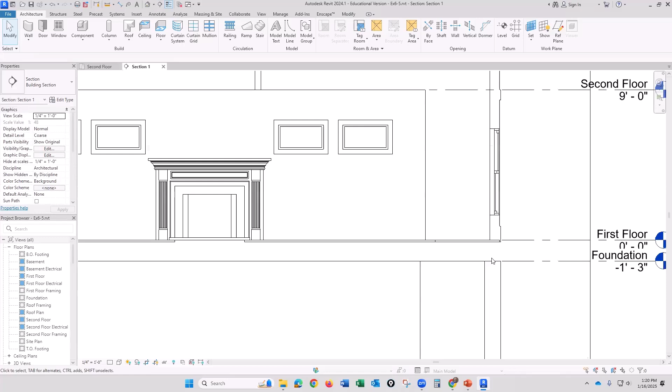You'll notice he hasn't had you put the floor in yet here. What we're going to have to do is make sure that the face of the siding is lining up with the face of the foundation wall.

Now, in order to see how that actually looks, I'm going to turn the detail level to either medium or fine, and I'm going to zoom in on it.

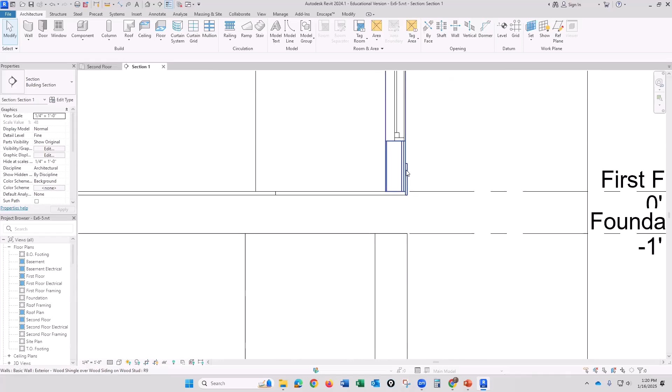So what he's asking for: this is the drywall, this is my stud, this is my plywood or OSB sheeting, this is my siding, and this is my trim or my sweep.

And then there's another sweep up here. So I'm going to tell you what the real world is and what the book is. The real world is face of stud lines up with face of concrete, because then your siding and your plywood overhang that a little bit, and they're not sitting in water all the time at the bottom. The water can just drip free of them.

But this person who wrote the book decided we're going to line them up, and the beauty of that is if you dimension your wall to the face of the stud and your foundation to the face of the concrete, if the dimensions are the same, you know it lines up. If one's 48, the other's 48. There's none of this confusion. When you're building it, it just makes your life easier.

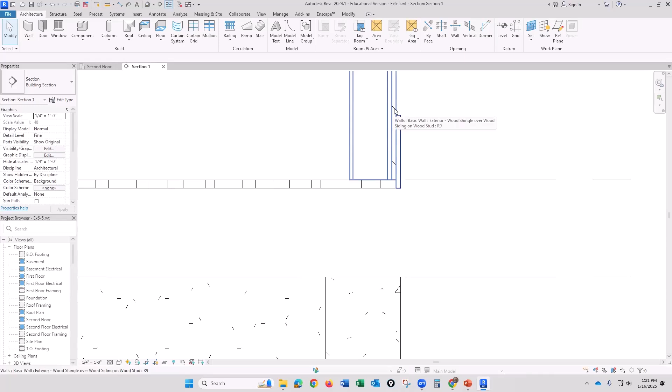But let's just say our boss is stupid and requires us to dimension it to the face of the siding. So the easiest way to do that, if that was a comment on yours, is to use the align command in the section.

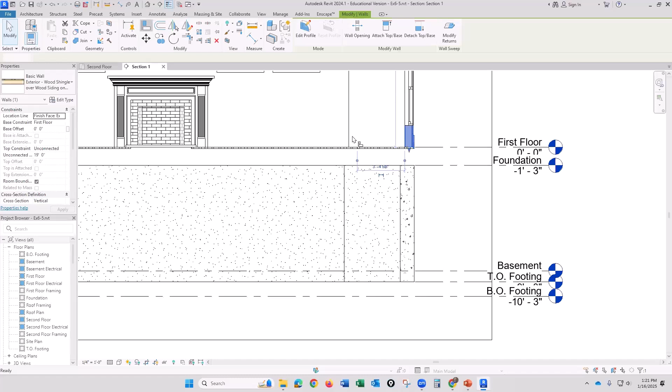So what we're going to do is click on, just to get my align command to show up here, I'm going to go to align. I want to align to the face, and then I want to go to this face here. I don't want to go to the trim board.

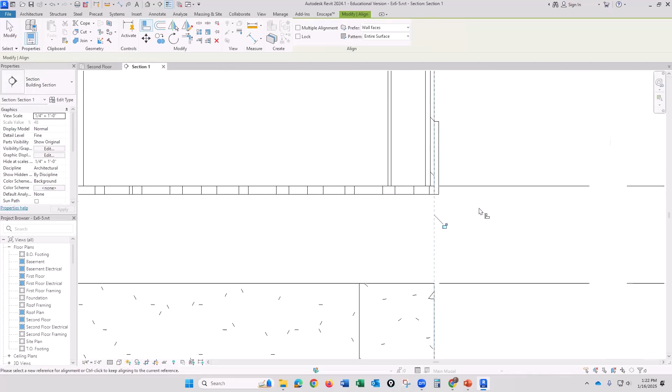And when you're dimensioning your floor plan for chapter 7, that's the one you want to go to. There's a little diagram on Pete's notes in plan that shows which line you want to pick. So in order to get that to line up, you just have to cut a section.

And then once you get into this align command, you align it like that. Once you've done that, I can move this section out here and get these two walls. I can move it back here and make sure this one's lined up, move it back here and make sure that one's lined up, move it there and make sure that one's lined up. I can cut another section and make sure these two are lined up, these are lined up, and those are lined up. Becca did it in 5 minutes.

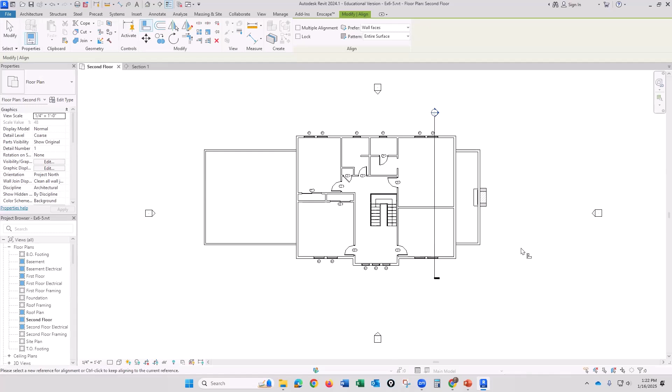Yes, you had a question. How do you choose first?

Yeah, you have to pick the one that you want to align to. So it says at the bottom, when you click on the align command, please select a new reference for alignment. The first one is the one you don't want to move, you want to align to. The second one is the one you want to move.

So which one do you want? You want to move the foundation because you already got your dimensions figured up on the first floor. So I'm pretty sure for mine that I've submitted to you, I first clicked on my house side. Okay, well, we'll check that out.

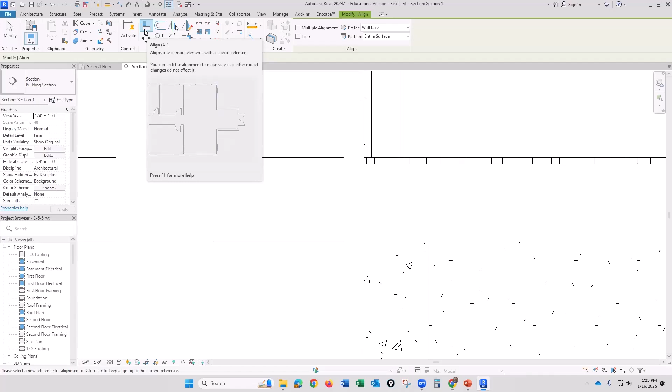Then you're just going to have to adjust it when you adjust the dimensions. So let's talk a little about dimensioning.

If you dimension in coarse and you don't, so like if you look at fine, this is where students run into trouble. If you go into fine, you can override it and get to that trim board.

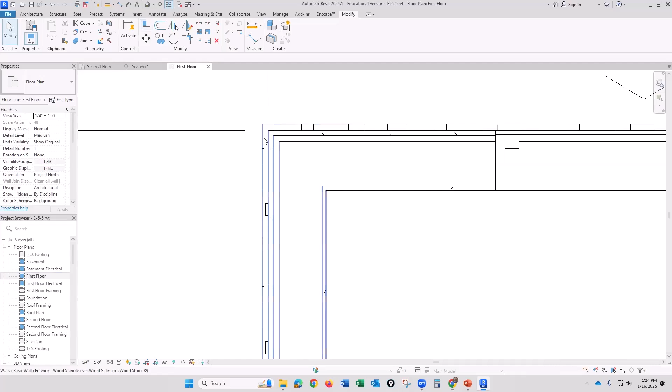Well, let me get to the first floor, that's the one that can see the sweeps. So there's a sweep there. You don't want to dimension to those trim boards. You want to dimension to the face of the siding. So if you micromanage it and force it to go to the face of the trim boards, your dimensions are going to be off.

So let's show you what I recommend for dimensioning there. I recommend on that first floor when you go through and do that. There's a PDF of that example that I've got posted up there. Just match that, match where I've got the dimensions and what the dimensions are.

And I actually did a video where I walked through the whole thing, how I dimensioned it this second time through. So there's a video on my YouTube channel. Let me just show you what I would typically do for dimensioning.

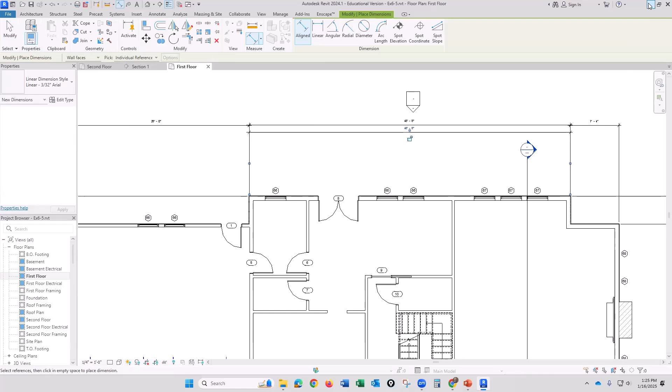So let me just show you my Pete's notes, I'm sorry, my video channel here, my YouTube channel. So for the one where you're running through and you're dimensioning...

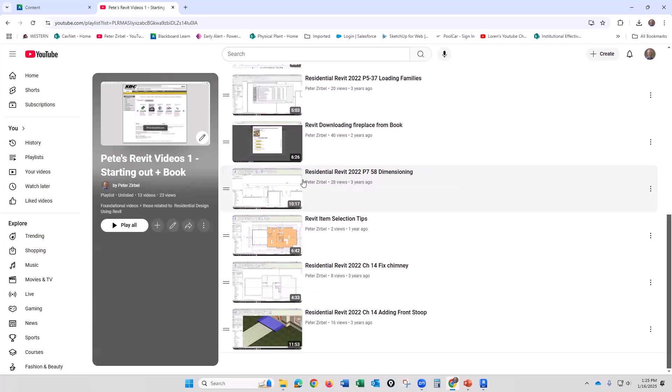So this is page 7-58, dimensioning. I think I went through and basically dimensioned a fair part of the house. So watch that video, it kind of walks you through how to do it, but then there's a PDF of that final one that you end up with, and you can just basically match my dimensions and put the dimensions in the same place as you go around.